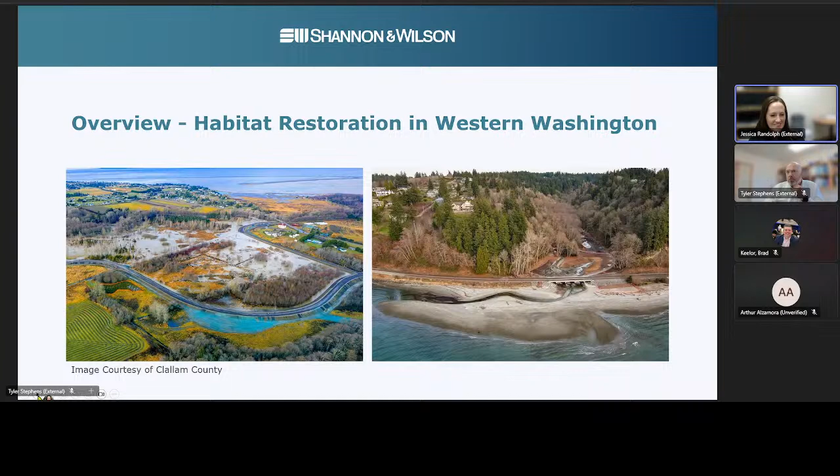The Lower Dungeness River Floodplain Restoration and Levee Realignment Project is the one I'll cover today, while Tyler has a separate job under that same habitat restoration theme in Western Washington. This project was for Clallam County, specifically the Department of Community Development, with a lot of involvement from their Public Works Department. Shannon & Wilson was the prime for both the design and construction management phases, which were pretty extensive in duration, from 2016 all the way up to the end of 2024, just this past year.

The project is located over here. It's a little small in this inset, but it's on the Olympic Peninsula in Western Washington, on the very north end against the Dungeness Bay. The project location here is highlighted in red, across the sound from Seattle.

I've highlighted here a very extensive list of our project partners, funding partners, design team, and contractors. As you can imagine, this was very much a multidisciplinary project over this time duration. I won't go through everybody, but it was a multidisciplinary team that we pulled together to get the job done.

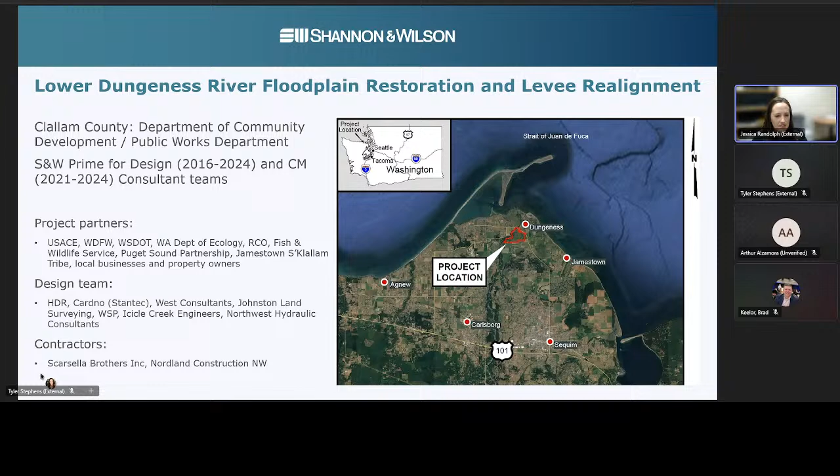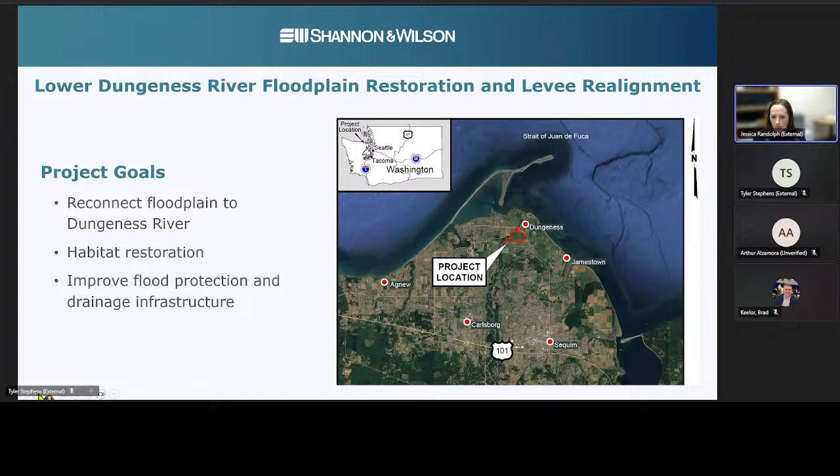Some of the project goals here, often similar to our other habitat restoration projects, are reconnection of the floodplain to the Dungeness River. The Dungeness River runs from the south up to the north, exiting into Dungeness Bay, and also includes habitat restoration as a whole within that area. Another goal is improving flood protection and drainage infrastructure within the project area and downstream as well. We'll talk a little about the project elements that went into meeting these goals.

On the right here I've got an image of the project site, with various elements drawn in that we'll talk through. First and foremost, you can see the Dungeness River running from the south roughly up to the north here. You have to use your imagination a little bit, since this image is post-project construction.

The main stem of the Dungeness River runs along the left side of this purple line, which was the Dungeness levee removed as part of this project. This was a core levee built in the 60s that constrained the Dungeness River along the left side of that purple line. That levee was removed as part of the project and set back to the green and red alignments along the sides of the page. This was roughly 6,000 feet of new setback levee along the Towne Road levee in green and the north levee in red.

Those tied together to various existing points on the project site, including on the south end where it's labeled River's Edge Levee. This is an adjacent project from the Jamestown S'Klallam Tribe, also setting back the old Dungeness levee that continued off the page to the south. They constructed a setback levee as well, with a lot of the same project goals and benefits, and we tied in directly with that levee at that connection point.

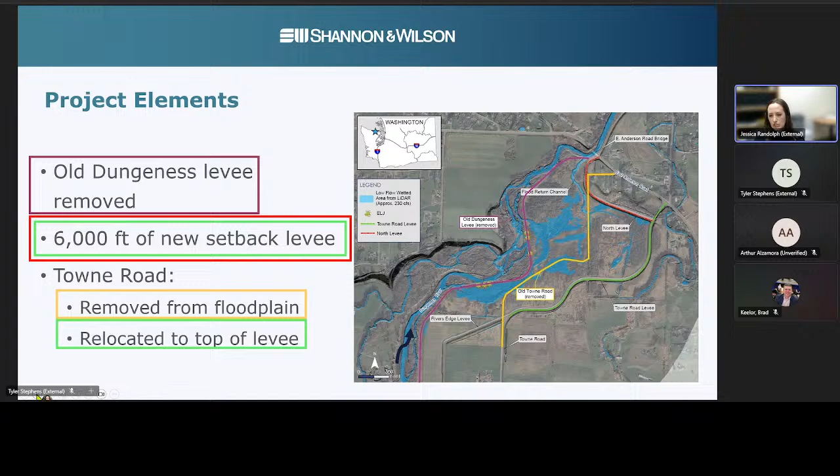So very much tying in with a lot of local project partners and parallel work, which we'll talk about more later. In yellow is another element of the project, Old Towne Road. This road ran right in the middle of our new anticipated floodplain area, and as part of this project, that old road was removed and relocated onto the top of the Towne Road levee shown in green. That's another element we'll look at a bit more.

This opened up an area of floodplain reconnection and habitat restoration targeted for this project, about 110 acres shown in blue, specific to the county's project. Also included, underneath that, are new starts of side channels and flood return channels cut into the floodplain to help facilitate floodplain reactivation and drainage after a flood event.

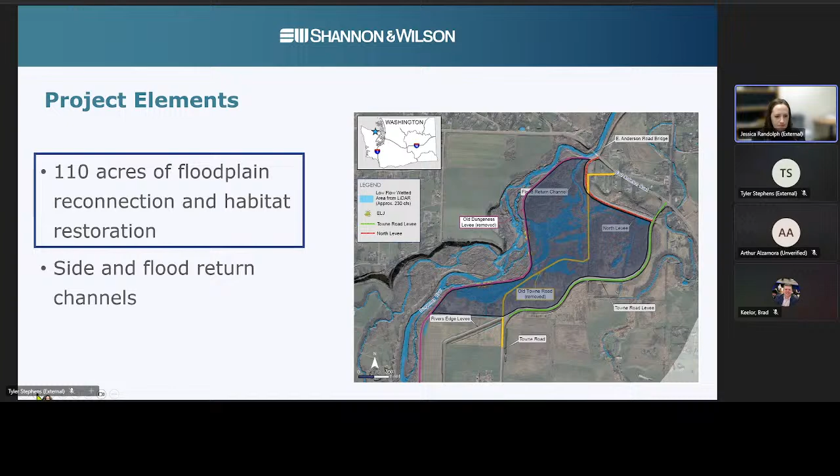These images, courtesy of the county, show a different view looking out toward Dungeness Bay—a before and after of the project. You can see the Dungeness River in its original condition, where the 1964 levee was, right next to it, and the previous Towne Road. On the right, you can see where we've opened up that middle area with new channels flowing through and set everything back. It's a unique look at the surrounding area for this project.

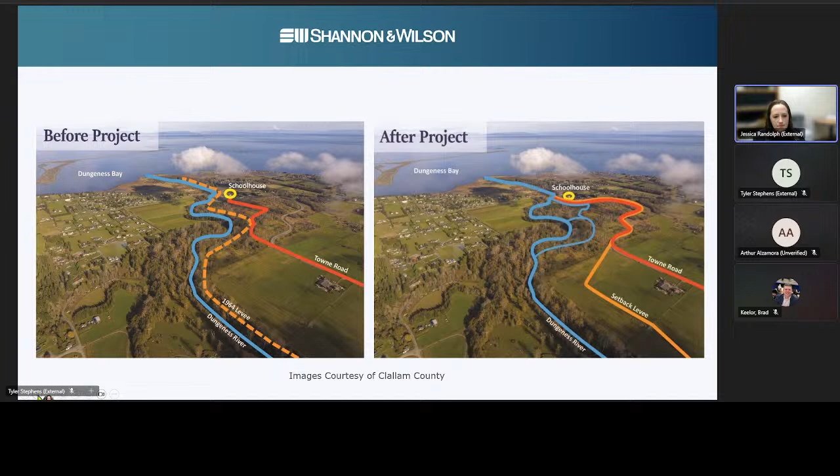I'll go through a couple more of these elements in more detail with photos that help paint a picture here. The Towne Road, shown in yellow on the right, was removed and then set back on top of the Towne Road levee. That whole road was dug out and removed from the floodplain so the floodplain could act in whatever form and shape it wanted to take.

This has become, on the left, a reconnected floodplain area—a real success. You can see some of the wood that was placed out there, but a lot of what was old Towne Road has become new channels cutting their way through as the floodplain develops over time. The orange is a flood return channel cut as part of the project for drainage after a flood event, tying back into the main stem of the Dungeness River, where it then goes underneath the East Anderson Road Bridge at the top of our image on the right. This has taken on a life of its own in a really great way, which is exactly what we want to see.

This is an image from post-construction, after you've got some good vegetation development within that floodplain area, and it looks different today than it looked a year ago, and on and on.

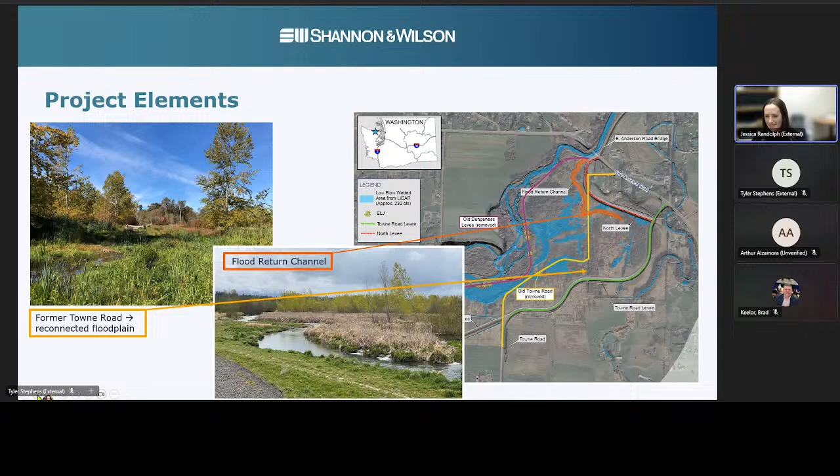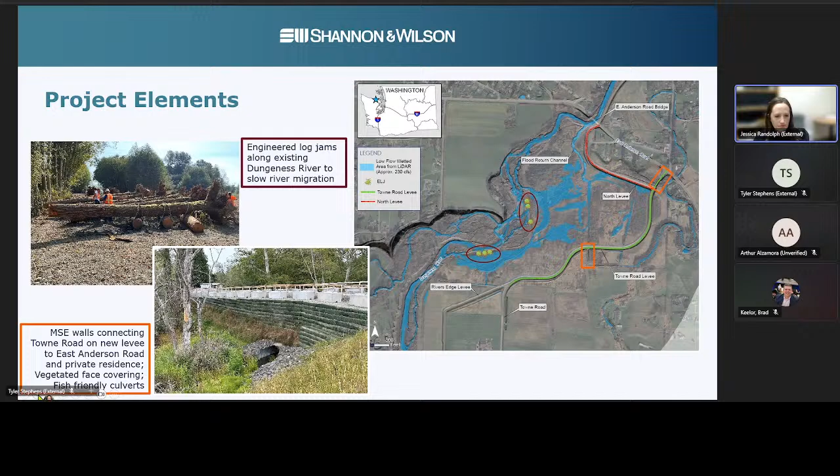We'll talk more about this later and how we got to the final configuration of Towne Road, but I've added some photos here of the connection points and the road itself on top of the Towne Road levee. The left picture shows that connection over the MSE wall between the levee and East Anderson Road.

The bottom picture is the final configuration on opening day of Towne Road on top of the levee. There are two lanes and a pedestrian trail off to the side, really covering a lot of ground with different options for folks to cross through this area, whether vehicular, pedestrian, or bikes—that's our final configuration.

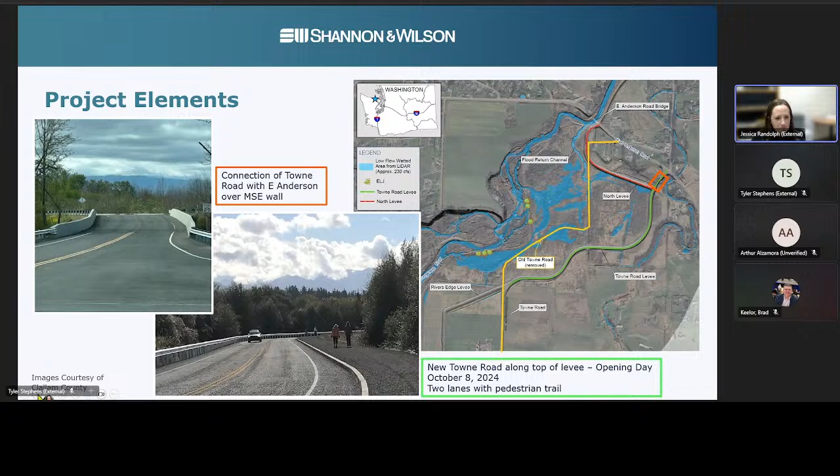So I'm going to spend a little bit of time on a couple of geotechnical design items because that's mostly my area, and we'll spend a few minutes there, and then we'll talk a little bit about some of the construction challenges and lessons learned.

So we did a couple of phases of subsurface exploration programs on the geotechnical front. This map on the right is dotted with a lot of different explorations, both historical and done as part of our efforts. This included borings, hand borings, pavement borings through the old Towne Road, CPTs, test pits in the old levee, and associated laboratory testing done to classify those soils, test their strength, etc.

So this was a couple of phases of explorations as alignments shifted, but we were really trying to get a good understanding of what was beneath the levee footprint, what the old levee was made of, and what was underneath the old road.

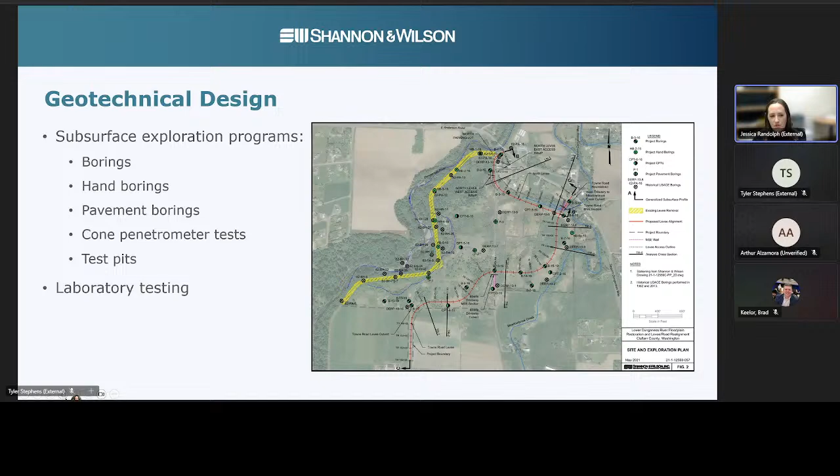So a lot of things to classify and figure out that would inform our design, and some of the analyses and challenges we needed to meet on the geotechnical front. The levee footprint is underlain by very soft silt and clay for the most part, and so this has settlement concerns and also bearing capacity issues if built too quickly.

Some of the different things we looked at was pretty in-depth settlement analysis, and we ended up overbuilding the levees because we want to make sure we're accounting for the long-term future settlement over the design life of the levee, and making sure we maintain the desired level of flood protection in the long term. So those need to account for settlement so that we don't end up settling below our design heights.

We also, as I mentioned, had that bearing capacity issue, so we limited the rate of construction the contractor could do. They could build 5 feet initially for the levees, then a waiting period of a week, and then 1 foot per week after that point. So limiting the rate of construction so that we didn't have a shearing failure beneath the levees during the construction process if they were built up too quickly.

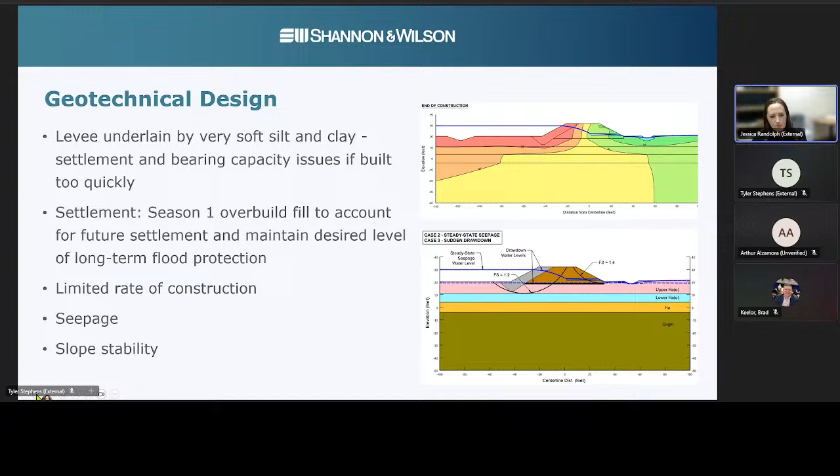And to the right are just a couple of snippets of seepage analyses and slope stability analyses per the Army Corps guidelines that we looked at and helped inform some of the items on this next slide.

This was our levee typical section that I've annotated here with some different colors, and I'll highlight a few of the items that were informed by our analyses.

So the levee fill specification was based on local pit availability - what was in the area. We went out and did some sampling and testing to figure out what was available in the general proximity of the project, and that informed our levee fill gradation.

In red here, I've highlighted we had a base reinforcement geogrid product, and that was included for stability purposes and allowed us to use steepened side slopes. So basically the steeper we could get those side slopes while still maintaining the levee crest height or crest width that we needed allowed for minimizing our wetland impacts.

So this is being constructed in wetland areas, and if we can steepen those side slopes, we can minimize our wetland impacts, which is a real benefit to the project. That base geogrid reinforcement layer was placed beneath the levee after the clearing and grubbing.

We also have on the left slope reinforcement geogrids on the riverward side, and those are to keep that steepened slope stable during a flood condition. You can see those on the left spaced out through the riverward slope.

And then on the landward side, at the toe of the levee, we have a horizontal drainage filter or drainage blanket layer and filter layer. That drainage blanket layer draws down the seepage water so that in a flood event it's pulled down to that toe area and can exit out the levee toe instead of exiting out the slope face during a flood event. The filter layer was designed around it to make sure the drainage layer stayed clean and functional - we didn't have fines and material migrating into that drainage layer and inhibiting its performance.

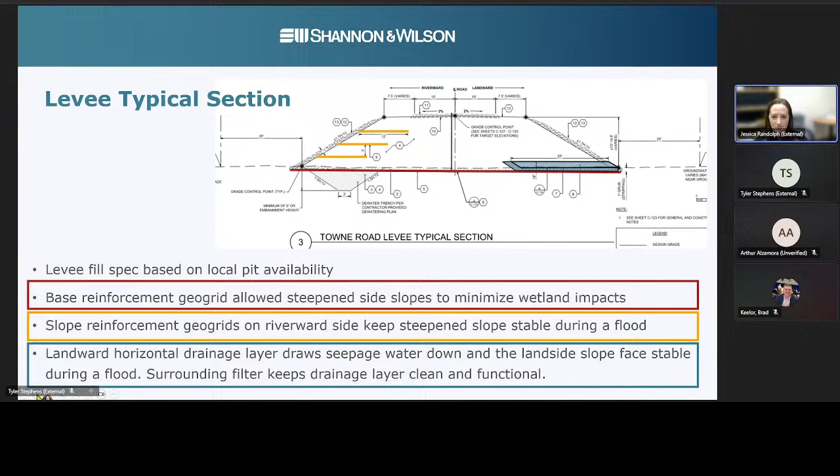Those are just a couple of the elements informed by our analyses.

Okay, I'll spend a few minutes on some of the construction specifics, and I've tried to highlight a few challenges, some of which are common to lots of the different projects that I'm sure everyone here has faced in different ways. And then some of our solutions, lessons learned, the process we went through. Of course, there are many more over these large projects with many players and stakeholders involved, but I've just picked a couple to speak to today.

The first challenge is that we are tying in and working in parallel with a project just upstream of ours, the River's Edge levee setback project, which is happening in parallel but with its own sponsors and its own grant funding. We are literally tying the two levees together, so it's not just two things happening independently.

It warrants and necessitates frequent, consistent communication across the board. We're supporting the county, and the county is communicating with the tribe to make sure we're figuring out what it looks like for us to tie into the levee they've designed and constructed. This also comes into play in my next couple of challenges.

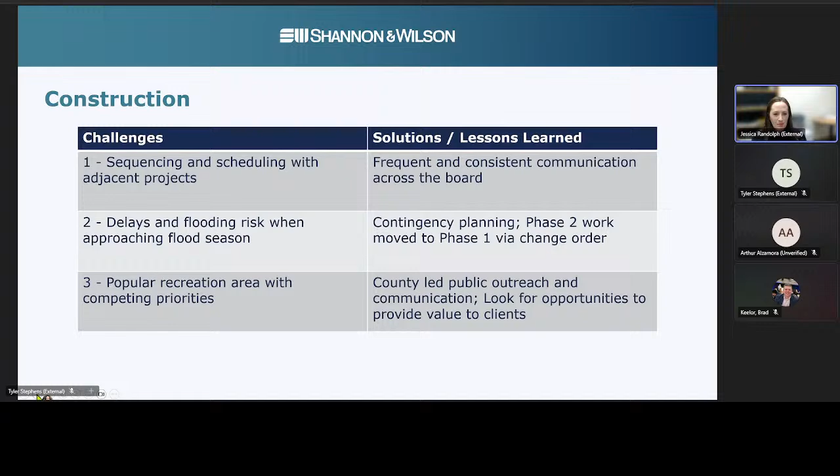I'll flip over to those. We found ourselves in a circumstance that ties with challenge number one. The original intent of this project and its sequencing was that we would construct most of the levees in phase one, and then, to allow some settlement to occur in that first year, we would have a phase two of construction.

However, as we all know, delays to construction, whether weather or anything else, happen. We found ourselves in a circumstance where the bid for that phase two work came in higher than could be accepted, and a couple of things like that ended up causing delays. We found ourselves approaching flood season in the fall with an incomplete levee, so my little tagline of 'levees don't work well with large holes in them' really came into play.

We found ourselves concerned because upstream of our project, the levee had already been breached ahead of the county's schedule. So the county's job site, let alone anything downstream, was not prepared for the flood season to come, where floodwaters would be entering directly into this construction site and then continuing on.

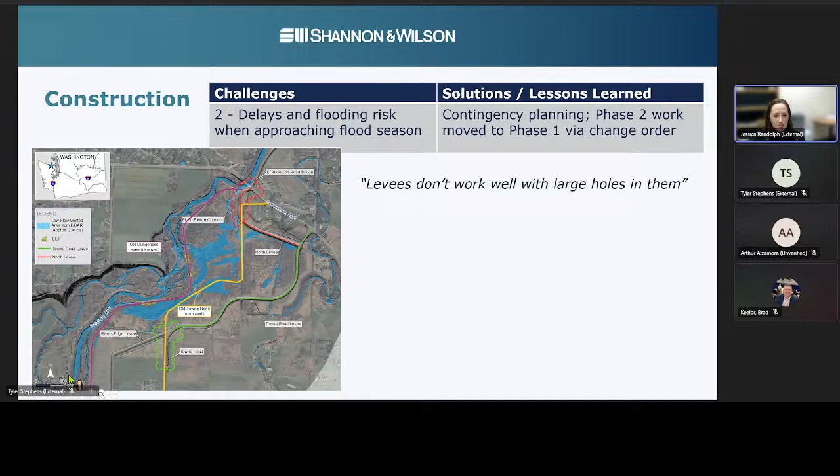So we kicked off a couple of things in parallel, one being contingency planning. We looked at lots of different options to figure out what we'd do if the work couldn't be completed in time. I won't go into detail, but we considered temporary levees, super sacks, aqua dams, et cetera.

We looked at blocking off the area between the old levee that was still in place and the new levee where we had this opening. In parallel, we were working to complete the needed work with the existing phase one contractor. Luckily, the phase two work was added to the phase one work via change order, and we didn't end up needing the contingency planning.

But it underscores the importance of communication and adaptability for our clients, supporting them through this process and looking at options.

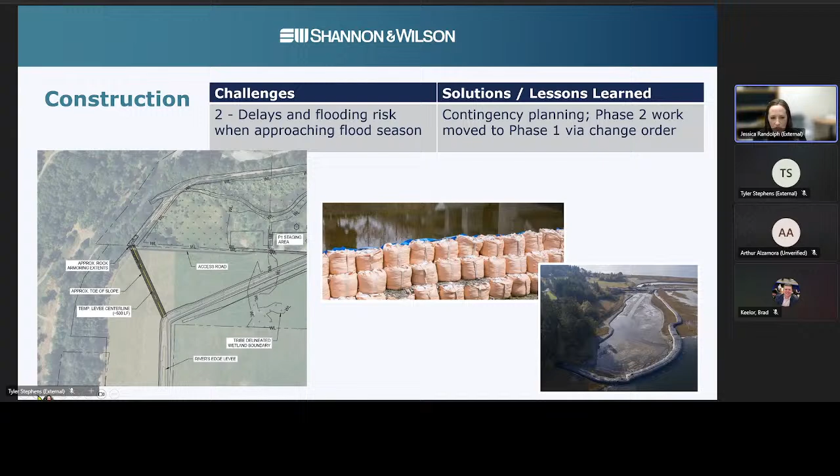The last item I'll point to is that the original design for the top of this road was a two-lane road on top of the levee, but throughout the construction process there was robust public involvement with competing priorities: road only, trail only, or a combination. The county led a public outreach and communication effort, and this underscores the need to be adaptable in our design.

We were able to fit two lanes and a mostly 6-foot pedestrian trail on top of the levee with a curb to separate them. It's a reminder for all of us to look for opportunities to provide value to our clients.

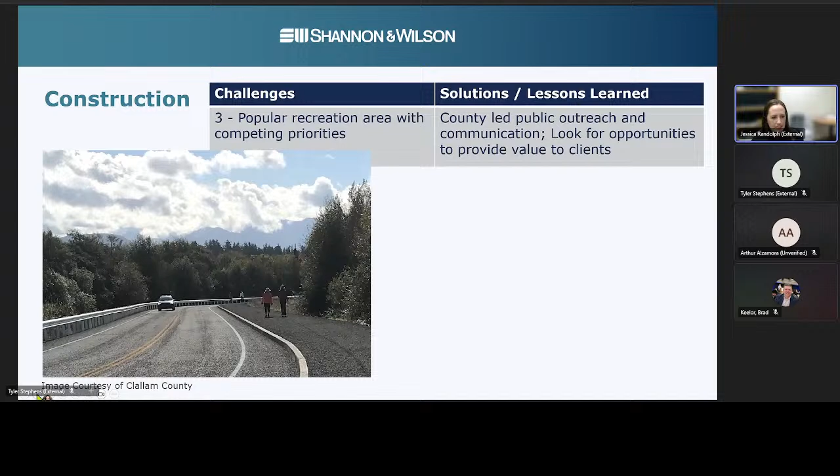My last element here is that this was really a habitat restoration success story. I've got some specifics about elements that support it: woody materials slow water velocity for spawning and rearing habitat, revegetation, reducing river temperatures, et cetera. This job had 24 acres of wetland creation and 51 acres of wetland rehabilitation, plus lots of planting done by the county to help facilitate this habitat restoration.

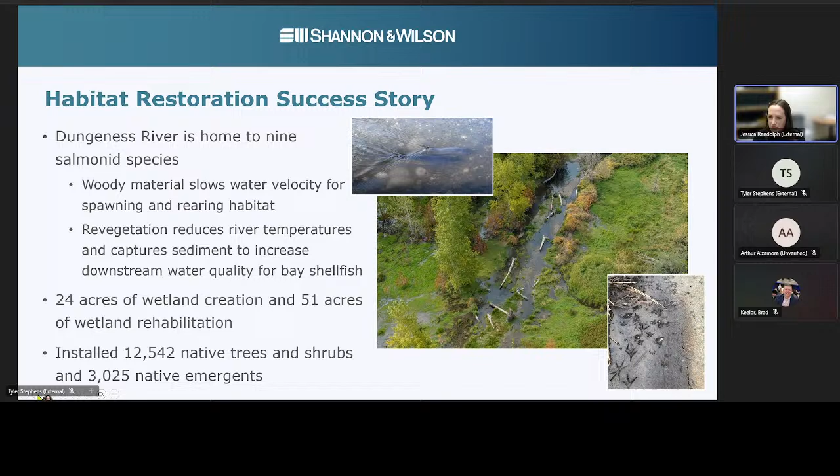So really a success story all around, and just a quick summary of our involvement and some of the project elements. Okay, I'll kick it over to Tyler then.

Thanks, Jessica. Picked a great time for the battery in my mouse to die.

So I'm going to talk a little bit today about the Meadowdale Beach Park project, up in Edmonds, just north of the city. The site history is kind of central to the project challenges here from a geotechnical and construction standpoint. I'll go through some of the geologic and conceptual studies we undertook early in the project, then the more detailed geotechnical explorations and design, which included some historical research that was a bit unique to this project, and then the BNSF bridge construction.

This project involved twin railroad bridges to replace an undersized culvert, which was the primary focus of the project, to restore habitat. I've got a short time-lapse video of that bridge construction we can go into a little bit later as well.

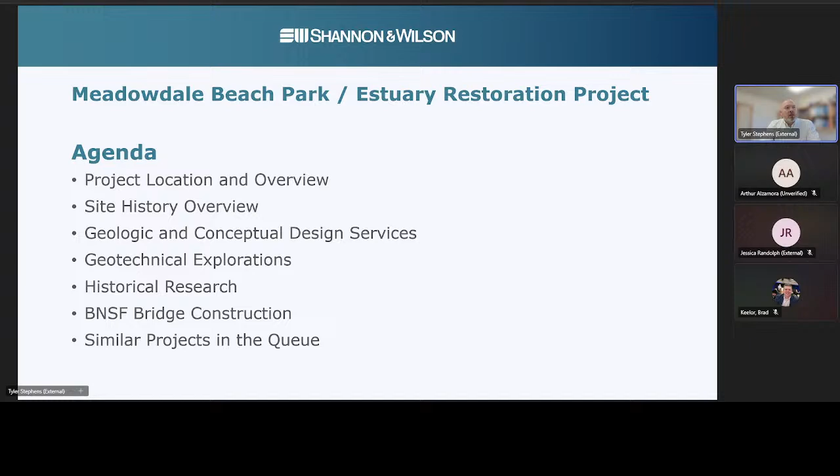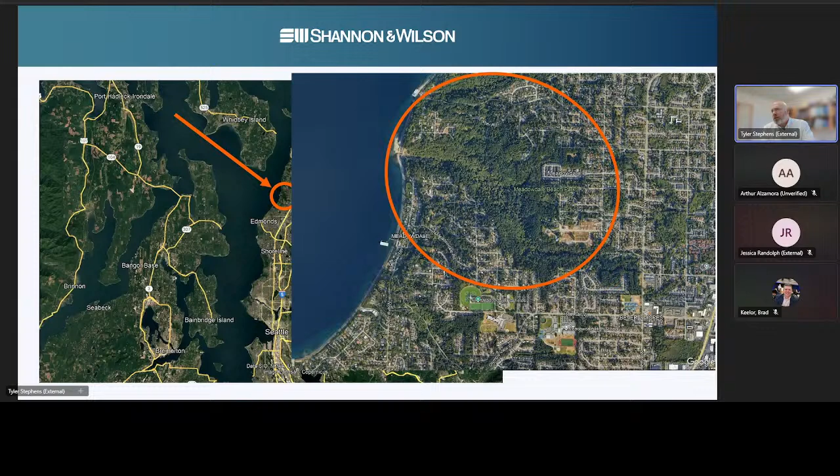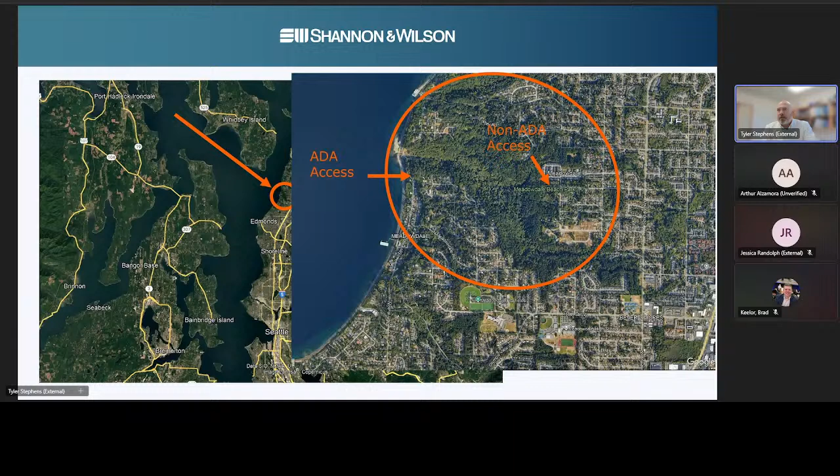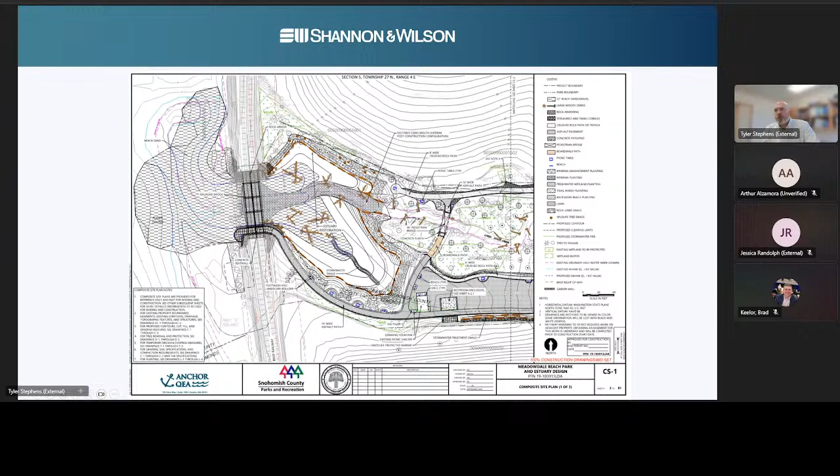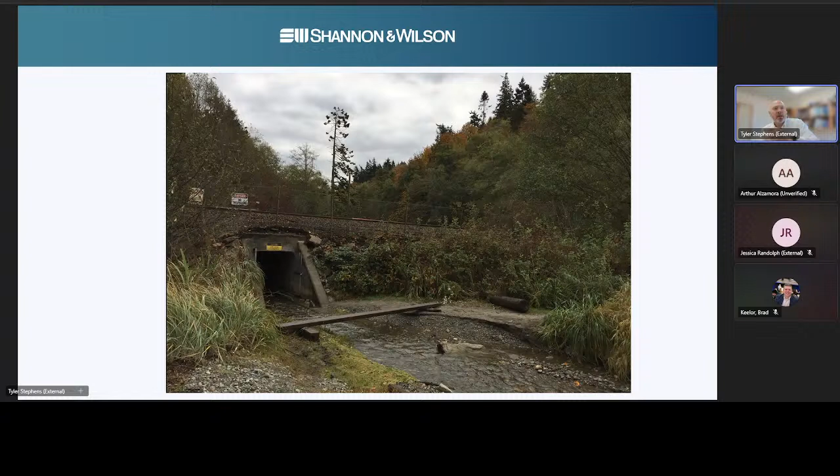What you see here is this very narrow ledge along the south side of that culvert structure, which was the primary pedestrian access from the park side to the beach side. This is not necessarily a high flow condition, but nonetheless the walkway was underwater at the time this photo was taken. During the wet winter season flooding conditions, sediment would get deposited within the culvert and cause it to flood even worse. It was not really a feasible access route for pedestrians to get to the beach, which caused a lot of trespassing up and over the embankment across the BNSF tracks, an obvious safety concern.

So there were a lot of stakeholders involved here, and there were a lot of drivers for the project: habitat restoration, pedestrian safety, improved beach access, a list of reasons why this project had a lot of support from a lot of different entities.

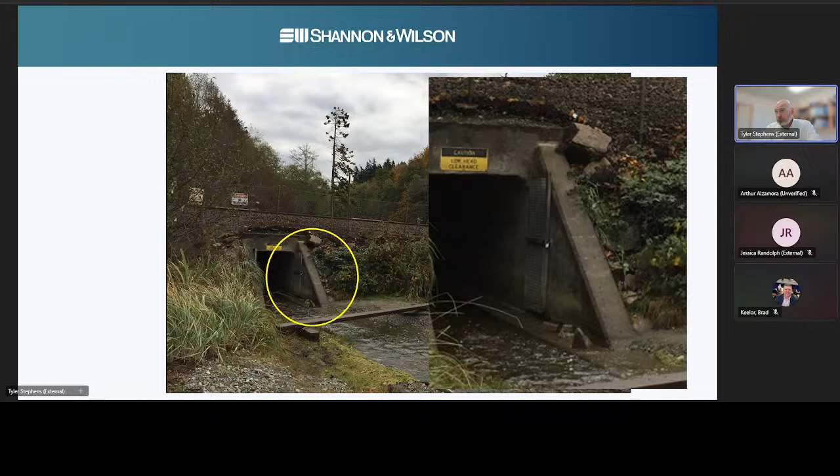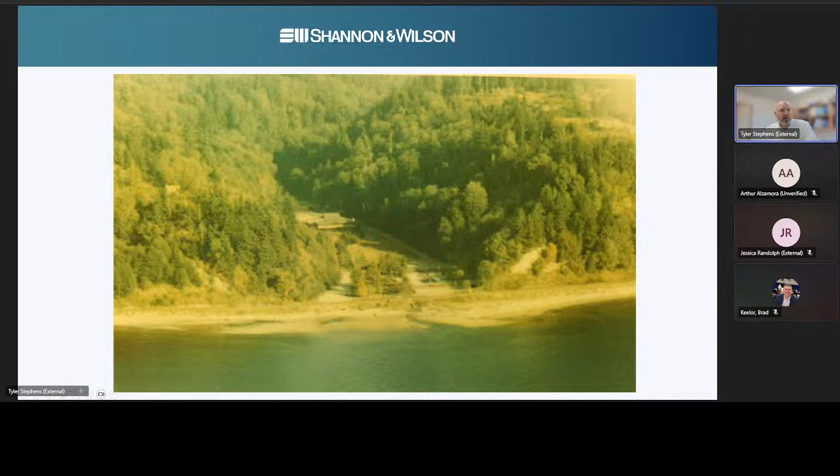Site history: Meadowdale was historically a rail stop way back at the turn of the century, when they first developed the rail line through the area. No photos of that time period, but some older oblique photos show the area was formerly a country club - the Meadowdale Country Club existed on the site. Here's a shot showing the primary country club structure, and down here, a bit foggy, you can see there's a pool and a pool house structure that comes into play as far as construction. Here's another shot looking down the slope toward the pool house and pool structure.

During design, there was speculation and indication that the pool had never been fully demolished and removed, but had instead been filled with debris during demolition and covered over with soil, which turned out to be true and was a driver for part of our subsurface investigation program.

Here's another shot from 1977 showing that the main country club structure had been demolished, as well as the pool structure, which had also been demolished and covered over.

What I'll also point out in this shot is that the culvert passing Lund's Gulch Creek beneath the railway embankment has an outlet channel that runs more or less a straight line to the beach, which is not necessarily a natural flow path, and certainly was not conducive to fish spawning and habitat, especially during high flow conditions.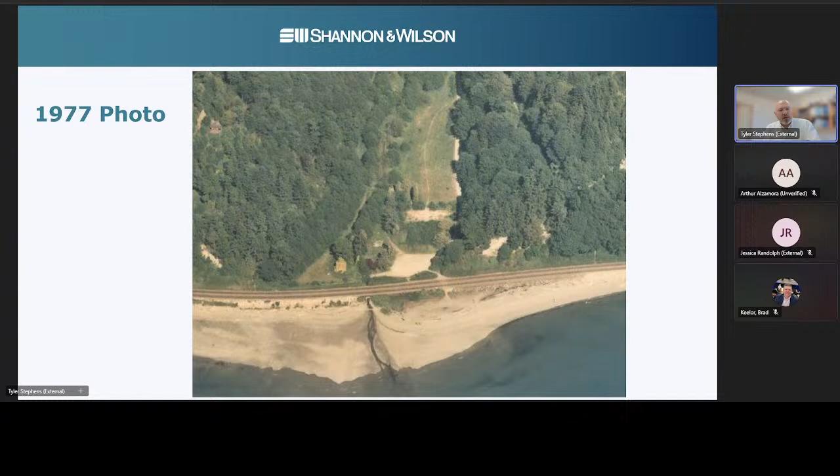The restriction that the culvert caused was hydraulic, increasing velocities and really causing problems for fish passage during high flow events. So that was another reason to look at replacing this culvert structure.

Early on, in 2015, we started looking at the feasibility of this project, examining what options might be feasible or constructible for improving fish passage and replacing that culvert. We looked at tunnel options, and a variety of different options, ultimately landing on a bridge.

We also looked at the sediment loading conditions in the system, landsliding and other mass wasting processes upstream from the culvert, to characterize the sediment loading and what it would take to allow sediment to pass through the system. Then we looked again at the preliminary geotechnical assessment for what might be feasible for a tunnel, bridge, etc. A couple of earlier studies, and then our geotechnical analysis kicked off a couple of years later with a subsurface exploration plan and design analyses.

These GPR transects were conducted through the park area, as well as some similar transects up along the rail embankment. We were focused on looking for the buried pool structure or any other buried elements or obstructions from the country club demolition.

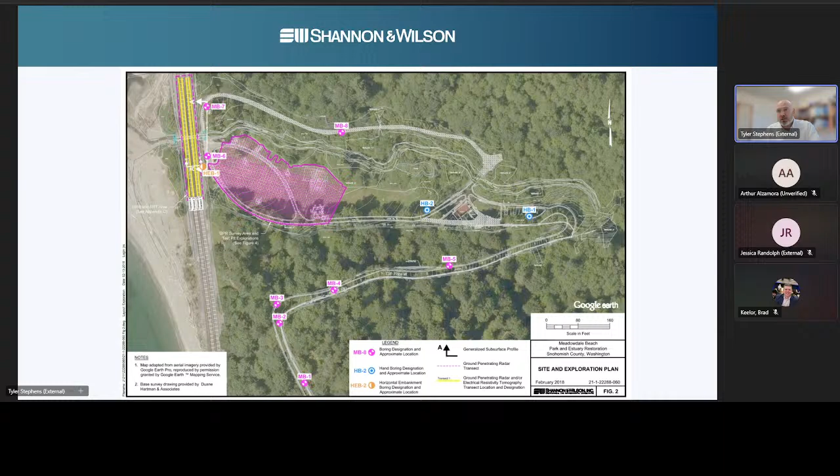The GPR transects down through the park area are shown in more detail here with different color coding, where the GPR interpretation identified shallow anomalies, less than 4 feet deep, and deeper anomalies greater than 4 or 5 feet in depth. It's kind of a shotgun blast, not a lot of clarity there.

We dug some test pits to confirm, and in one of the test pits we did encounter confirmation that the pool structure had in fact been buried.

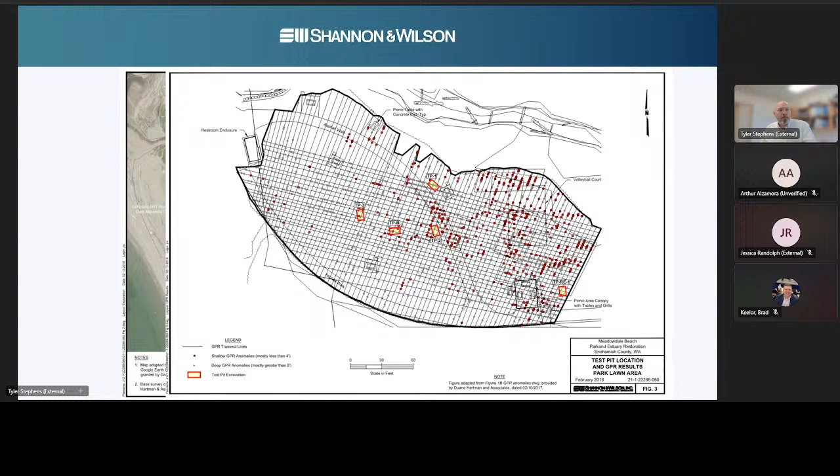A couple of the transects along the railway embankment showed we did not see anomalies that would suggest a buried trestle, which was another concern, since it was common practice to build trestles across such drainages back in the original construction period. We saw no indications of a buried trestle structure.

We also did not see any indications of buried rock or riprap. One anomaly that was interpreted here was the subject of a sub-horizontal boring. We drilled through the embankment to evaluate whether there was anything buried along the outward edge of the original embankment.

Also included in that exploration was electrical resistivity tomography, used to look for other anomalous conditions. Nothing jumped out in the geophysics interpretation there.

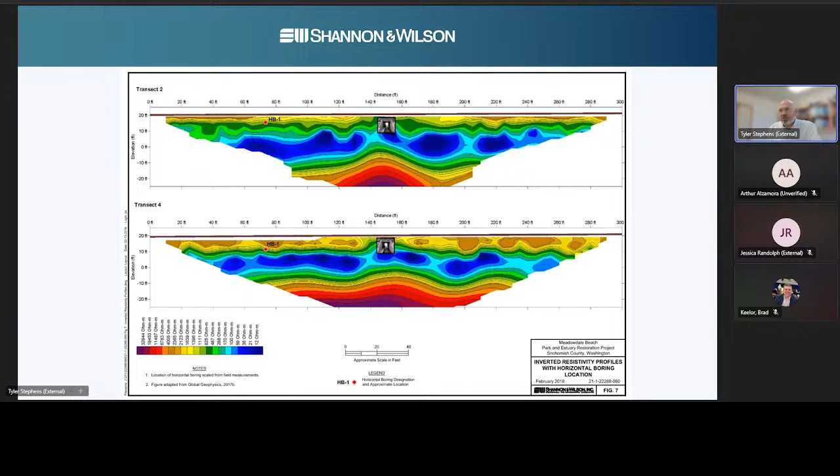One kind of unusual and interesting piece of our program was we contacted the Great Northern Railway Historical Society, which frankly I didn't know even existed before this project. There's a group of rail enthusiasts who have collected construction records and historical records from the Great Northern Railway, which then became part of what is now BNSF Railway. They maintain old construction records, historical artifacts, original design drawings, as-built records from when the rail lines were built, and records of the cost and details of construction and when it occurred.

These folks were very helpful in providing records of the specifics from construction through this specific area, which we used to try to understand or confirm whether there may be some buried structure - timber trestle, riprap, seawall, or what have you. There was record of several different types of embankment construction when the original line was built, a couple of which would have been problematic in terms of driving pile or putting shoring between the two tracks.

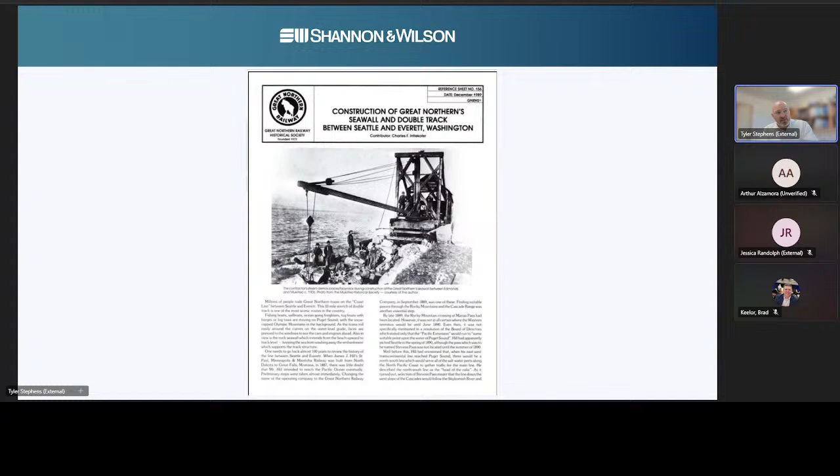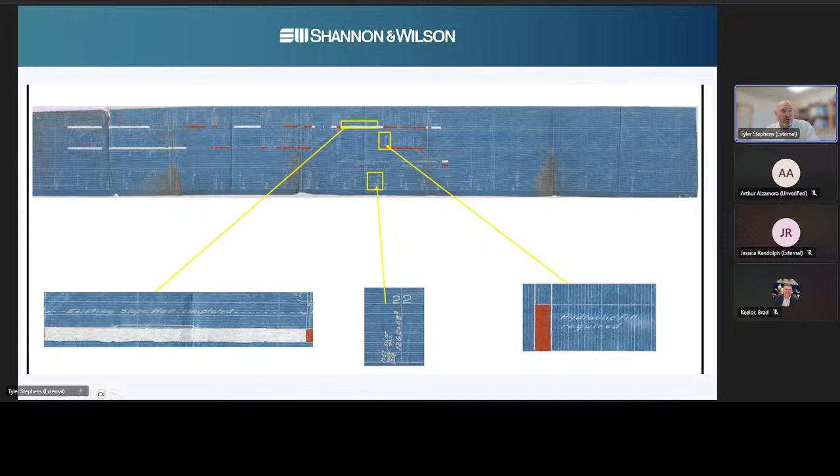We also looked at the as-built blueprint drawings they provided scans of. An example is shown here - this is actually the site. We're at milepost 22, just north of our site. The area highlighted here is the reach through the Meadowdale Park area. This note here was about the most conclusive information we found about what might be buried in this embankment. It says existing slope wall completed. We had to interpret a bit what that means, but it didn't mention anything about seawall, riprap, or timber cribbing - any of the problematic features we were concerned about.

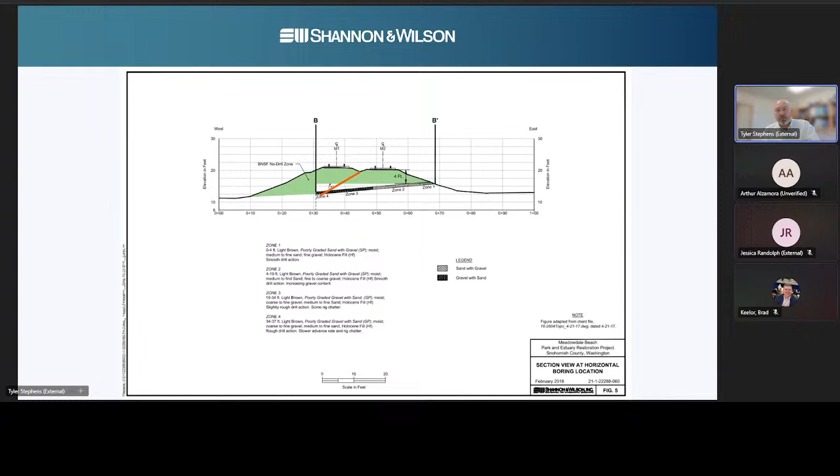As I mentioned earlier, we drilled a sub-horizontal boring through the embankment at that approximate location. The intent being if there was a buried riprap blanket or armoring along the original embankment, as shown here on the right, that boring would have encountered something hard and difficult to drill through, which we did not encounter. Putting all of that information together, we concluded there's likely not anything systematic buried in the embankment that would cause problems for construction. Of course, there's always the potential for obstructions of any kind when you're working with embankments and geologic materials, but nothing that we could find here from our investigation.

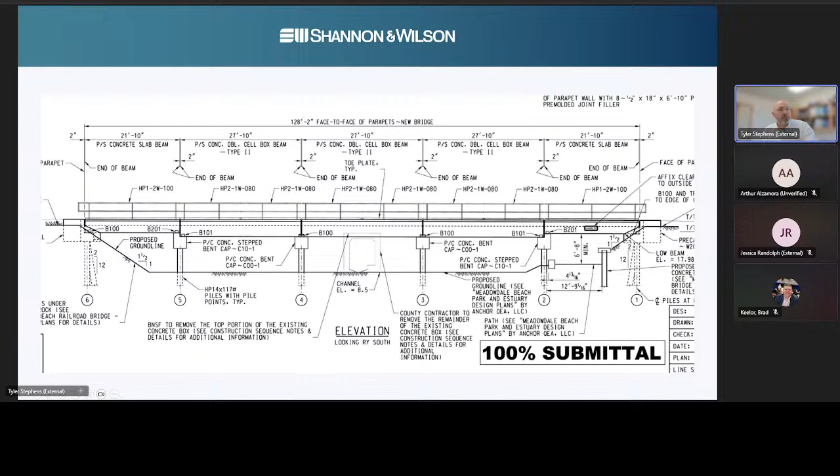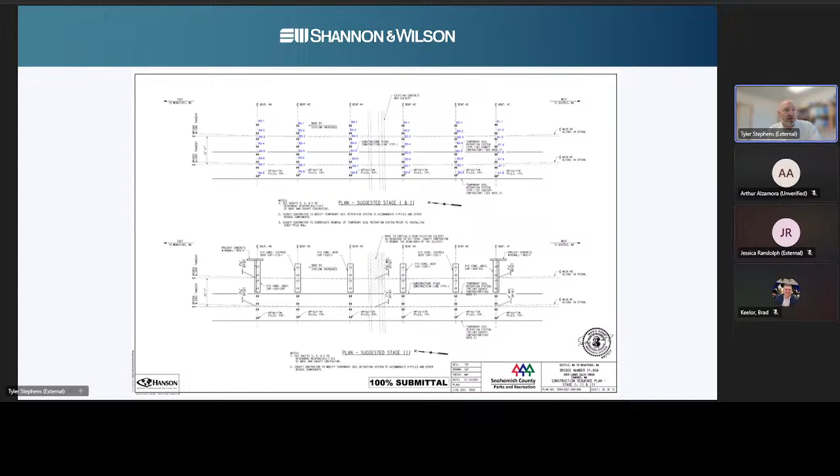The bridge was built in 2 phases - each half, the main 2 bridge and then the main 1 bridge, was built during a 24-hour closure, a single track closure, meaning we had to maintain live track conditions on the other track that was left open. That necessitated shoring between the two tracks to support the live track while the bridge under construction was excavated to expose the piling, and the pile caps, bridge girders, and other features were put together.

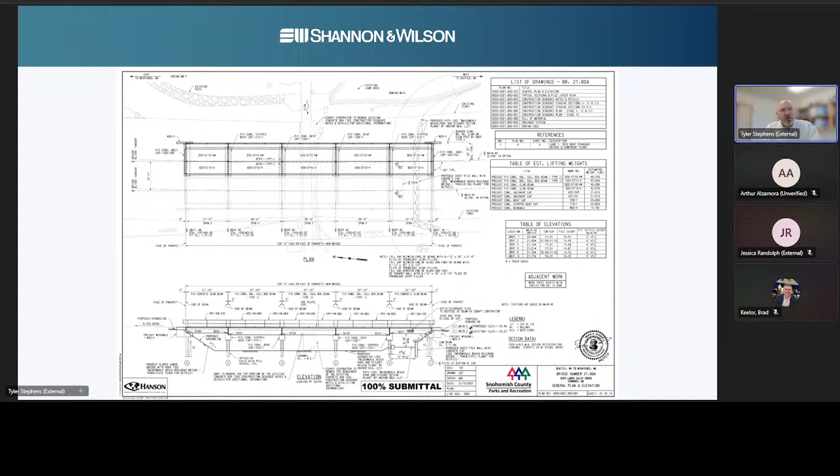So two halves of the bridge construction each occurred during a different 24-hour window. All the H-piles were driven in advance through the existing embankment, followed by the first 24-hour closure to dig out and build the first bridge, then repeat the process for the second. What's shown here is the concept included in the design drawings for shoring for the track that was to remain open - a back-to-back sheet pile wall with a tie rod between. The shoring design was left up to the contractor to finalize and select their preferred shoring. They ultimately elected to go with a sheet pile system, similar to what was shown here.

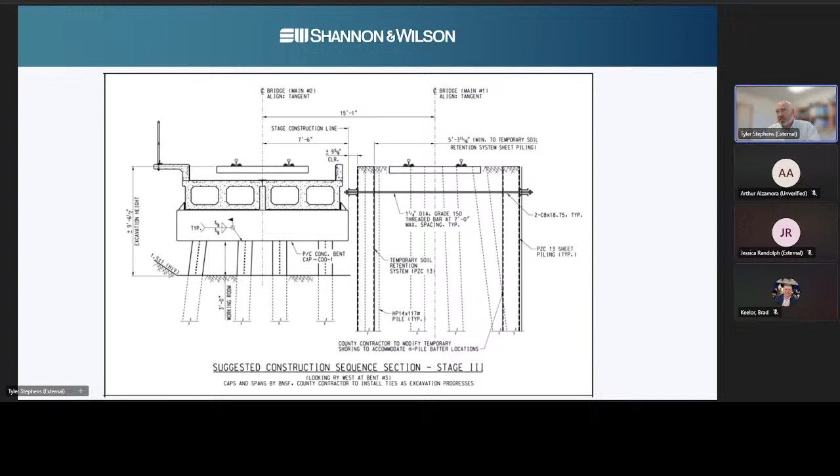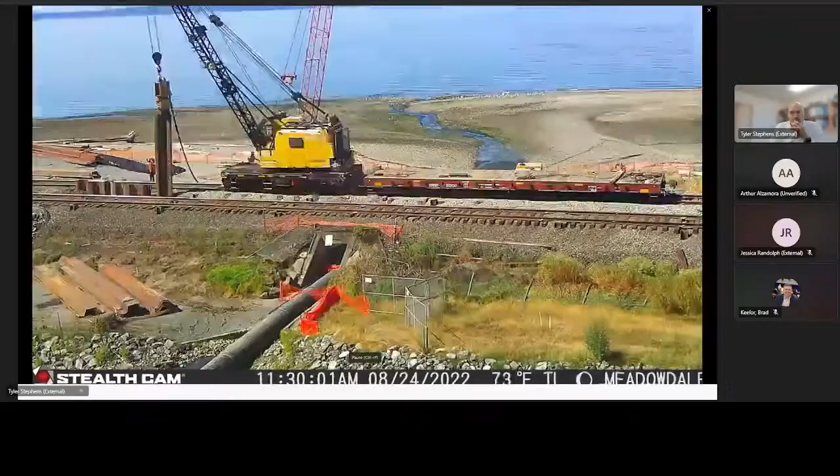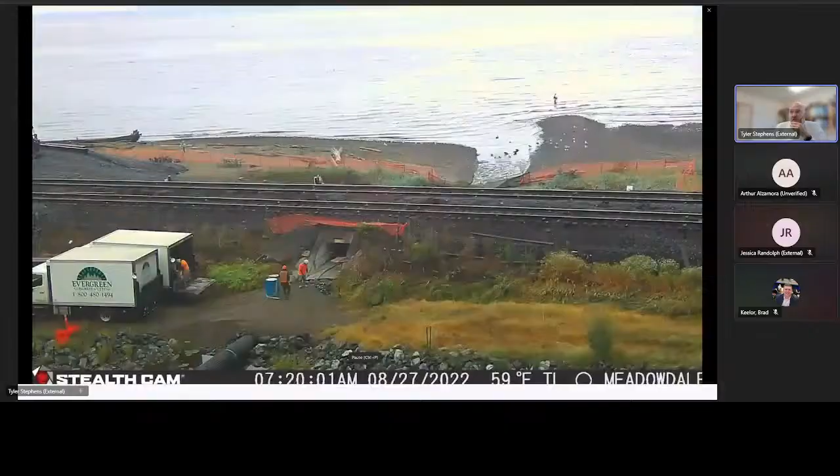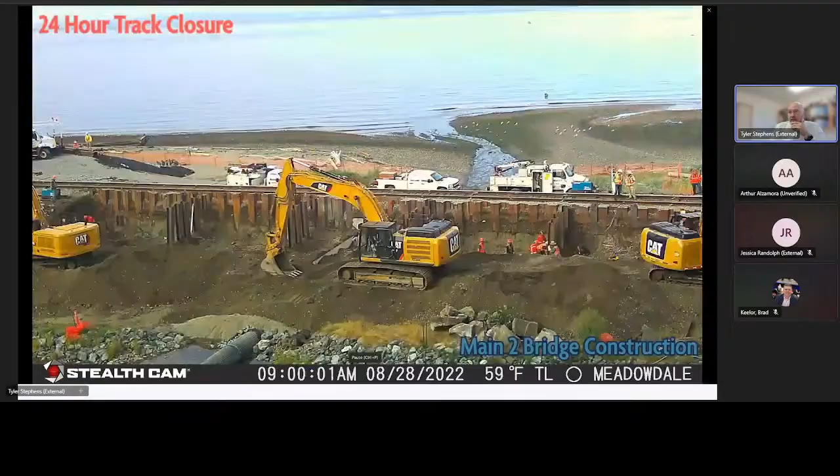Placing the shoring between tracks, doing some pre-cutting for the culvert removal. Then the 24-hour window begins by excavating out parts of the embankment, exposing the shoring pile caps, and setting the structure.

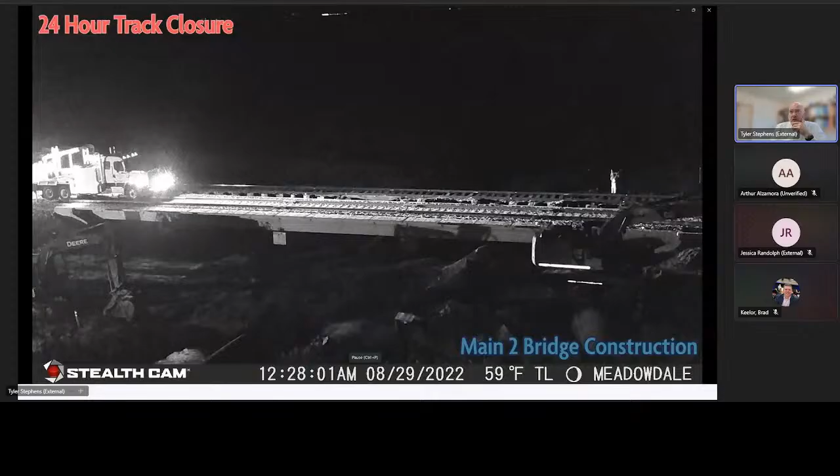BNSF crews performed all of the construction. They are a well-oiled machine when it comes to building these bridges. They had all of the movements choreographed almost down to the minute. It was something to see.

So the second bridge closure comes in: remove the shoring, dig out for the pile caps and bridge elements on the waterward side, and then build the bridge back.

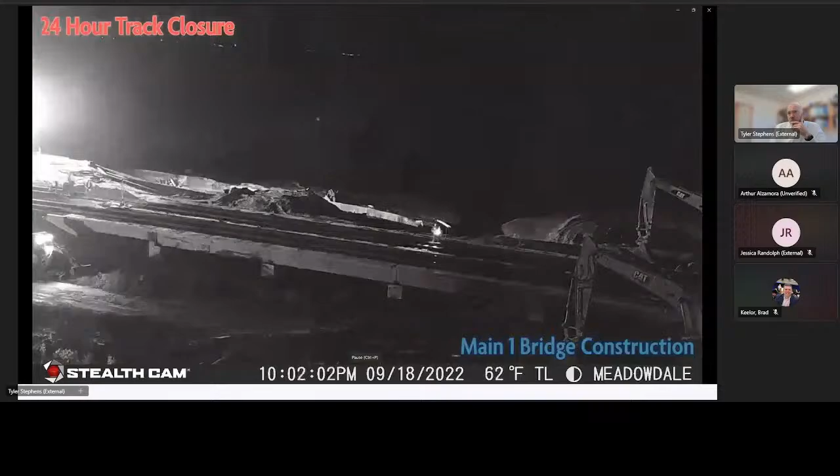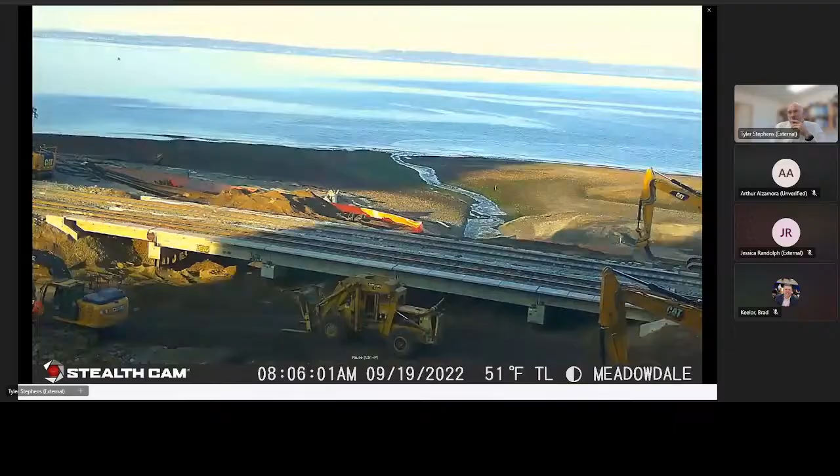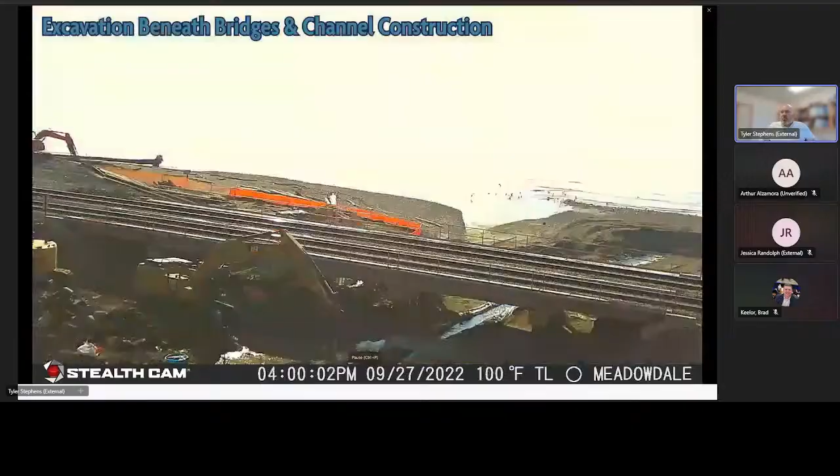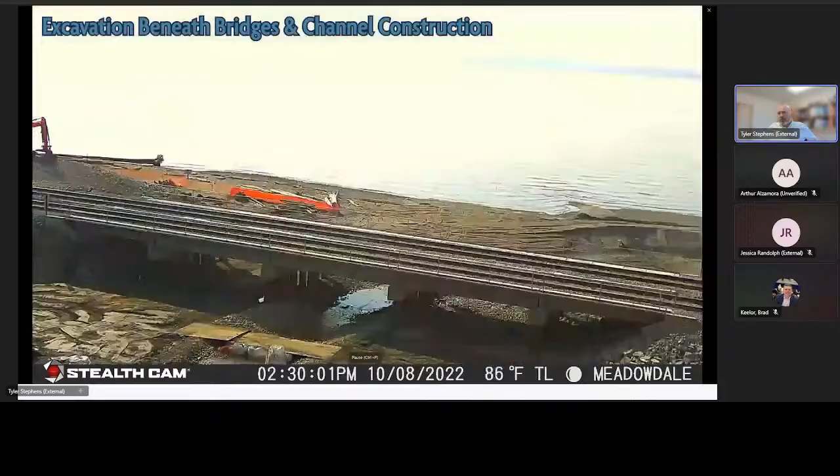Once both tracks were reopened to rail traffic, the contractor turned their attention to excavating everything beneath the bridge, keeping the bypass in place until the outlet channel had been constructed and was ready to resume flow, then finishing out the connection and the estuary, and ultimately the pedestrian path to the left of the frame here.

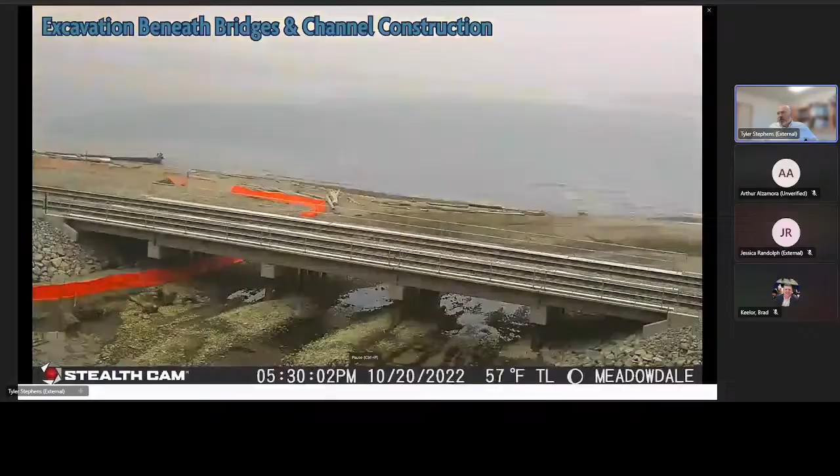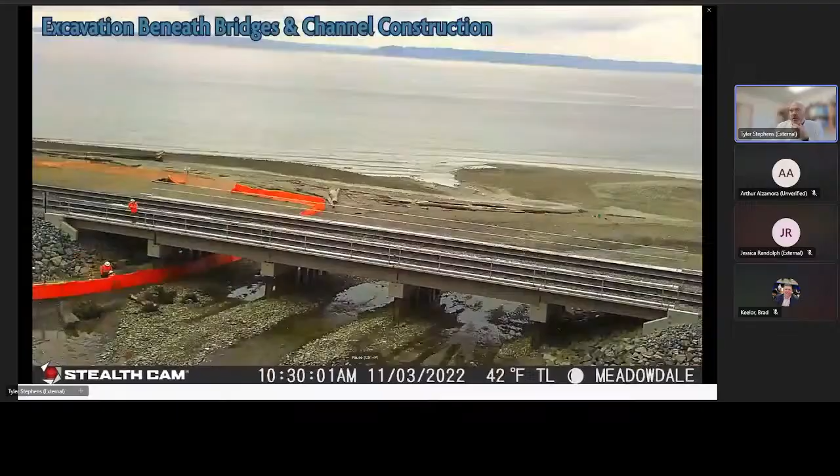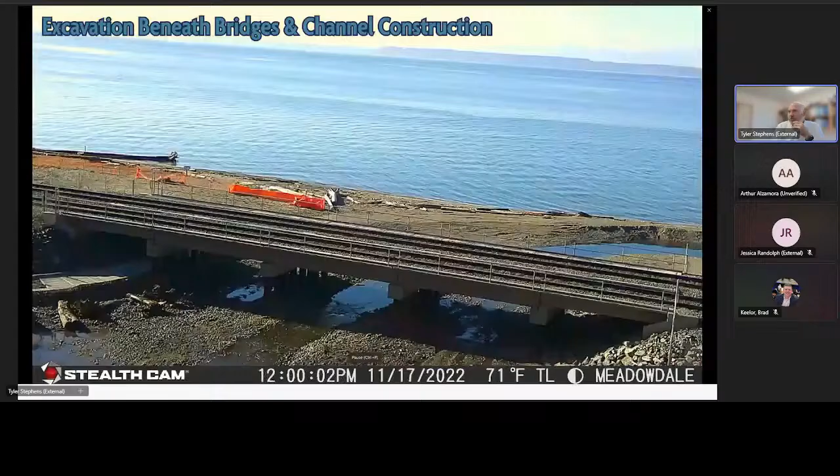You can see the outlet channel curves to the right of the frame here, northward, rather than shooting straight out to the water across the beach. They dug a channel to the north to flatten the gradient, and the biologists tell me this helps fish passage a little more, less current, easier for the fish to swim upstream and get into the estuary for protection.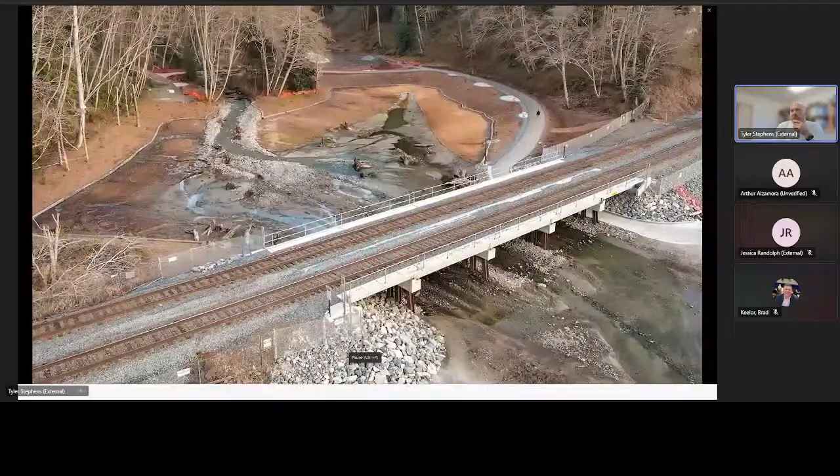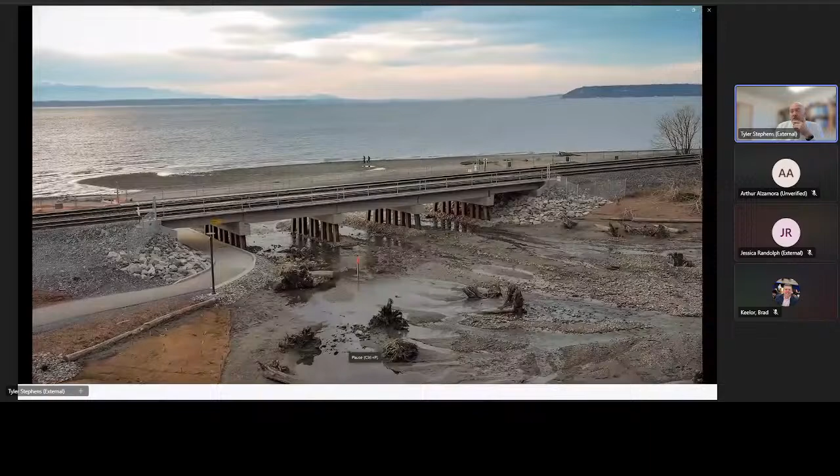Here's the finished product, showing from the outlet side, the pocket estuary, the pedestrian path also shown, and the rail bridge. I know construction was completed in June, and early during the fish migration window, a month or so later, there were fish returning to the system. So by all accounts, a very successful project.

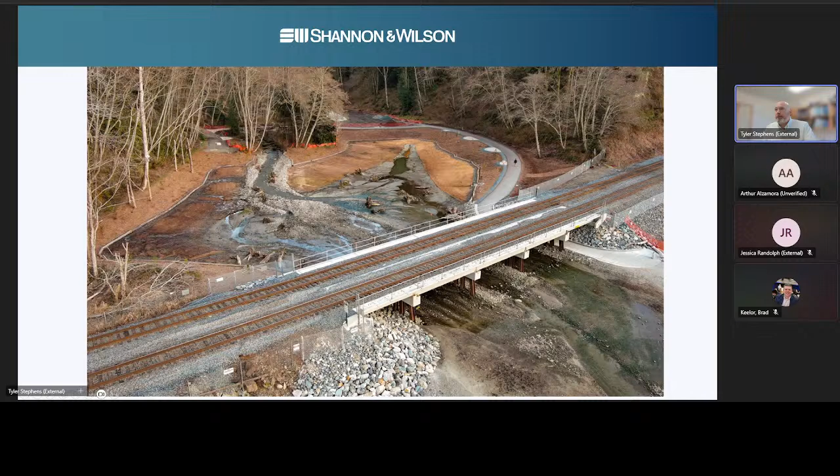Some still shots of the same that were shown in the video. And with that, I'll wrap it up and we can open it up to any questions.

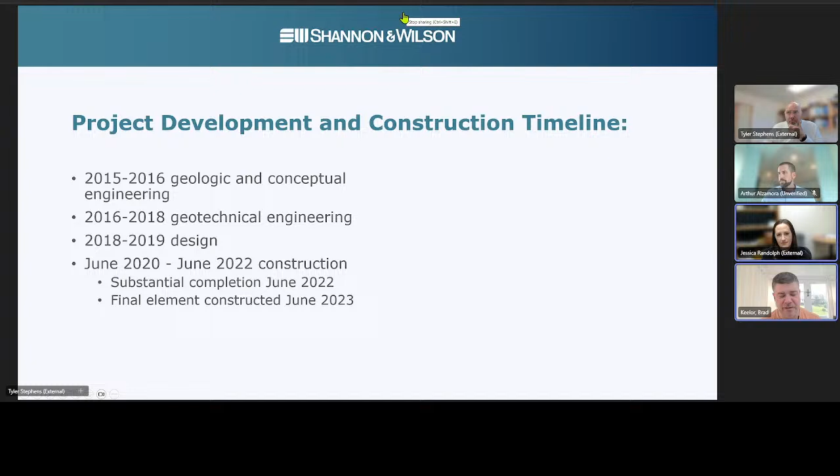That was awesome, guys, fantastic. A great presentation, and I hope this spurs everybody to want to go up to the Pacific Northwest for the ASCE convention this year. I'm really fascinated by it. I mean, everything is so different.

So the flooding thing, that was me, right? But I didn't think about it the way you did. The flooding we have down here is flash flooding—we'll get a massive rainstorm, 4 inches of rain in an hour, everything floods, and within 6 hours it's back to normal. I think the issues you guys deal with are probably different than what we have down here, and probably create a different degree of scour, I'd guess. Do you have any more thoughts on either one?

Scour is site-specific—that's the hydraulics folks' analysis. I know nothing of what goes into it, but there are specific guidelines it has to meet. I think WSDOT and AASHTO have the clearest guideline, that any permanent structure has to be a minimum of 2 feet below maximum scour depth for long-term stability considerations. So certainly the hydraulics of the system, current and post-construction, are a key consideration in all of the adjacent features' design.